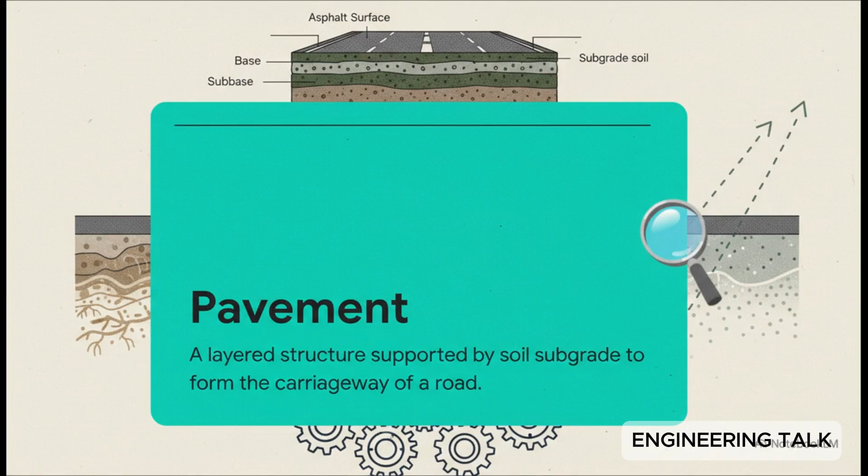Okay, so the official engineering term for this is pavement. But here's the most important part of that definition. It's a layered structure. This is so key. A road isn't just a big slab of stuff they pour on the ground. No way. It's actually a super complex system engineered from the soil all the way up.

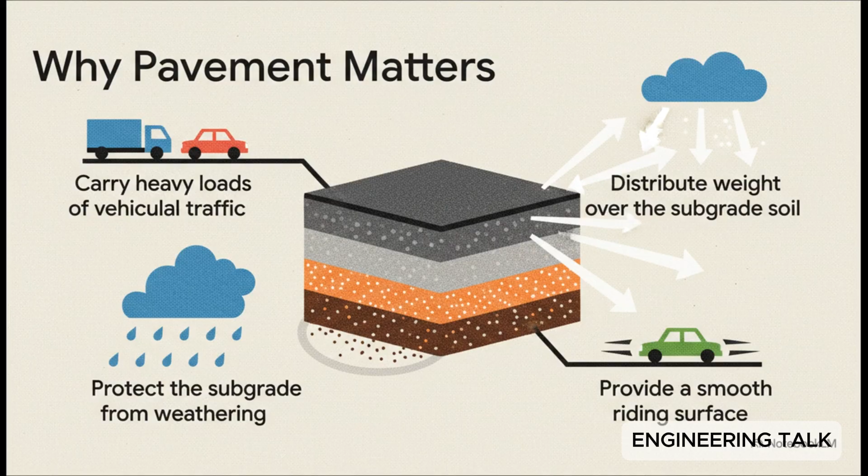And every single one of these pavements has some really critical jobs to do. First, it's got to be strong enough to handle all that traffic. We're talking cars, huge trucks, the whole shebang. It also has to spread out the weight of those vehicles so it doesn't wreck the soil underneath. And of course, it needs to give us a nice, smooth ride while protecting that soil from rain and snow. So how do engineers pull all that off? Well, this is where we meet our two contenders, the two main players in the world of road design.

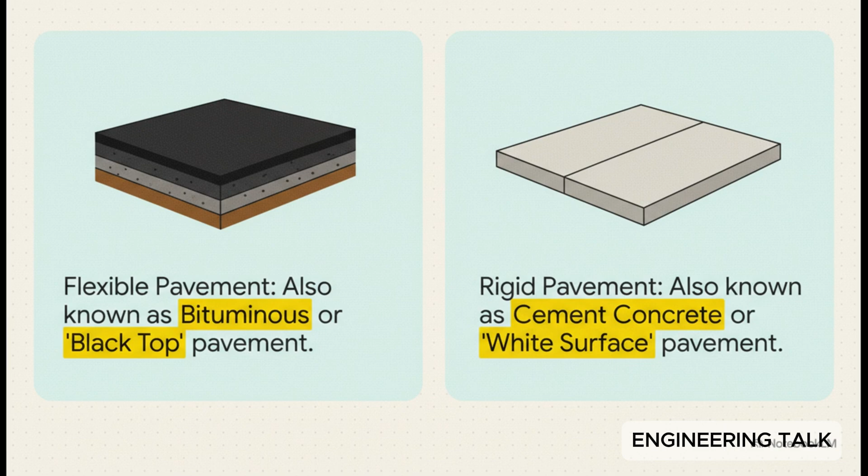All right, let's put some names to these faces. The black roads, that's what we call flexible pavement. You probably know it as asphalt or maybe blacktop. And the gray ones, those are rigid pavement, which is just good old cement concrete. But those names, flexible and rigid, they tell you everything you need to know. And I mean it, because the difference here is way more than just the color.

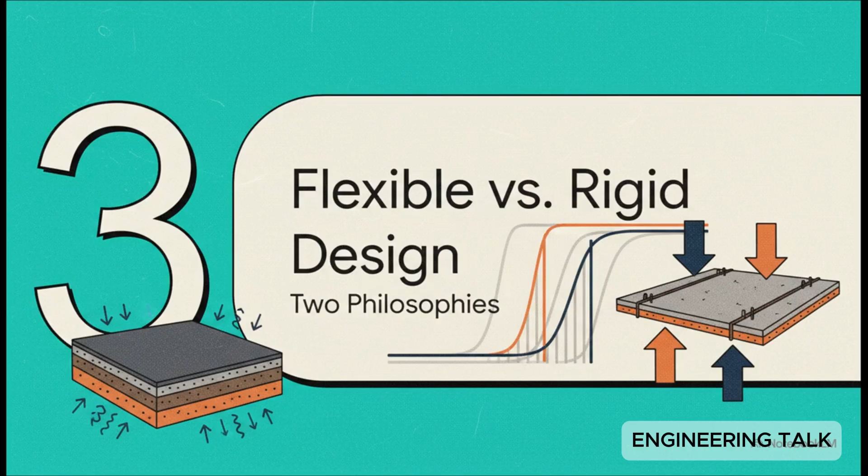We're talking about two completely different philosophies of how to build something strong. And for engineers, choosing between them is a huge decision. It's a big trade-off. They have to think about everything: the cost, the climate, the traffic, and just how long they need that road to last. So let's start with flexible pavement. The name really gives the game away, right? It's designed to bend or flex just a little bit when a car drives over it.

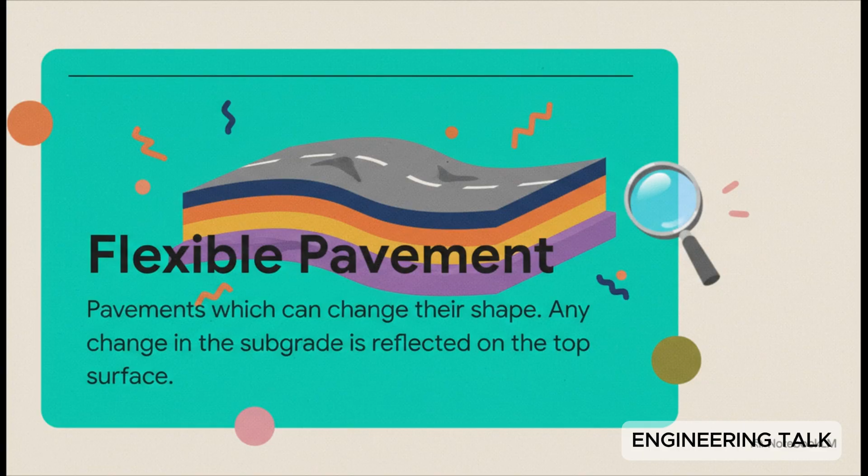Here's a great way to think about it. Imagine you put a big stack of magazines on a really soft bed. If there's a dip or a lump in the mattress, the magazines are going to bend and follow that shape. That's kind of how flexible pavement works.

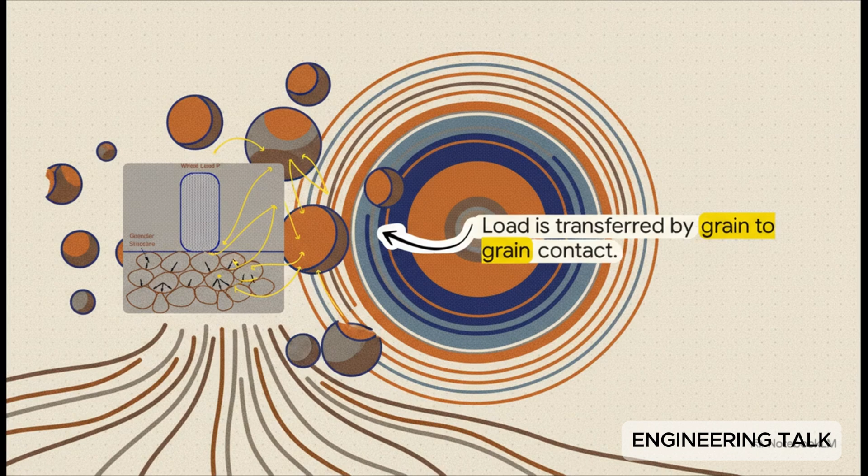And this is what that looks like on the inside. The weight from a tire doesn't just push straight down. Instead, it gets transferred from one tiny piece of rock to the next, spreading out in a cone shape as it goes deeper and deeper into the road's layers. It's all about that grain-to-grain transfer of pressure. Okay, now for the total opposite, rigid pavement. As you can probably guess, this stuff does not flex at all.

Let's go back to that mattress analogy. This time, instead of magazines, imagine laying a big, thick sheet of plywood on the bed. That board is so stiff it won't bend into the dips. It just bridges right over them, spreading your weight out across a much, much wider area.

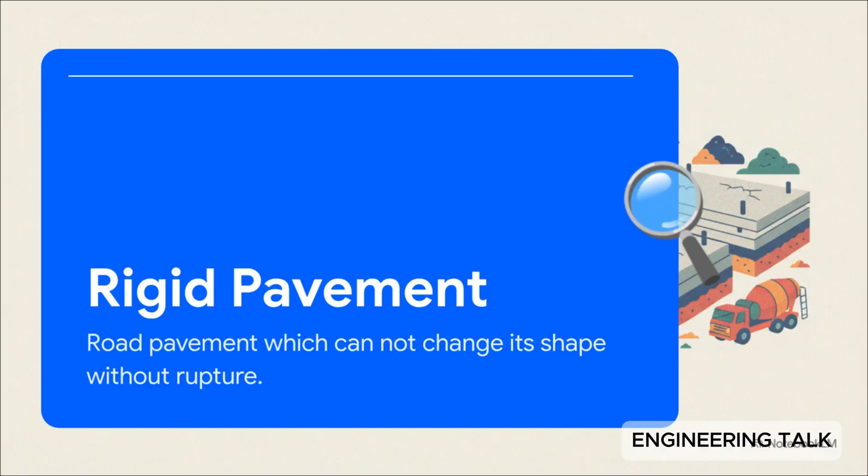And that's the whole philosophy right there, because it's so incredibly stiff, so rigid. Any little imperfections in the soil way down below don't really affect the surface you're driving on. All its strength comes from what engineers call slab action. The whole thing acts like one giant, super strong plate.

All right, so we've got the why. Now let's get into the how. How are these things actually built? Because the real secret, the magic behind both of these designs is hidden in their layers. Let's dig in and see what's going on underneath.

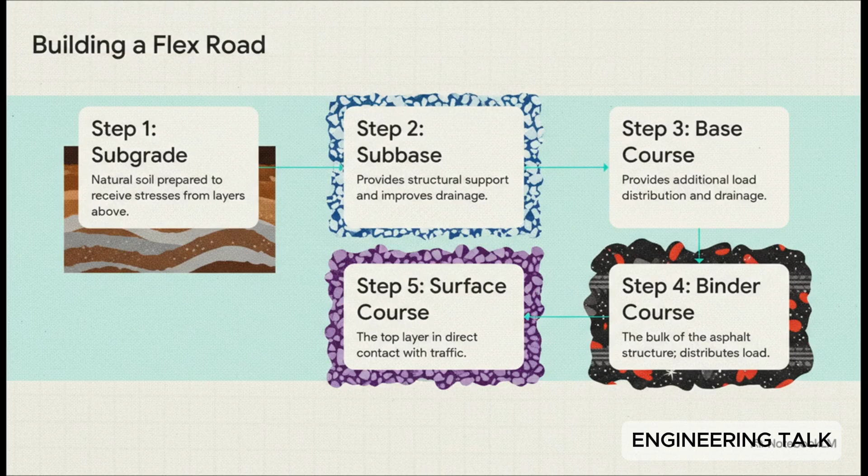So let's quickly build a flexible road from the ground up. First, you start with the soil itself. That's the subgrade. Then you put down a subbase, which helps with drainage and support. On top of that goes the base course, which is the main strength layer. Then you've got the binder course, which is the thickest asphalt layer. And finally, you have the surface course, the smooth part our tires actually roll on.

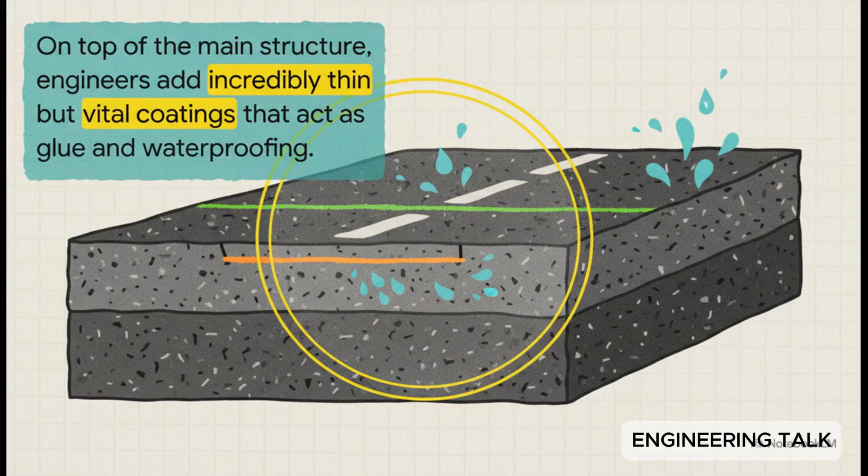But believe it or not, we're still not done. To make sure all those layers work together perfectly, engineers add a few more super thin but absolutely critical coatings. First up is something called a prime coat. This is a really thin liquid that soaks into that grainy base layer and basically plugs up all the little holes. Then they spray on a tack coat.

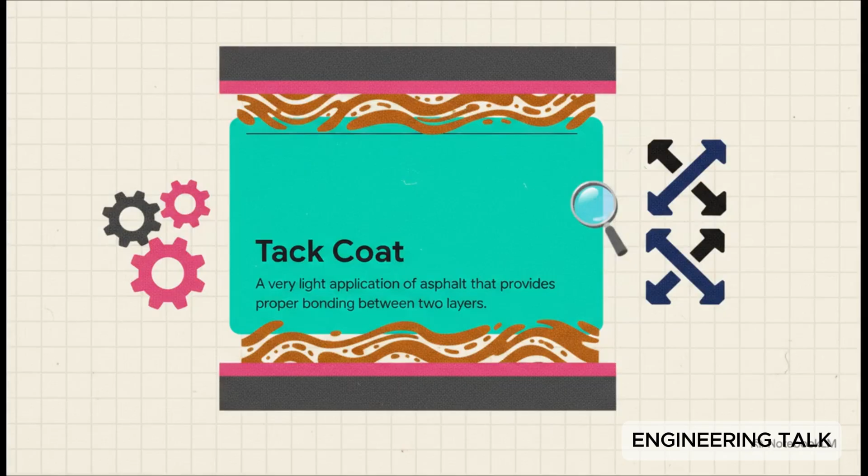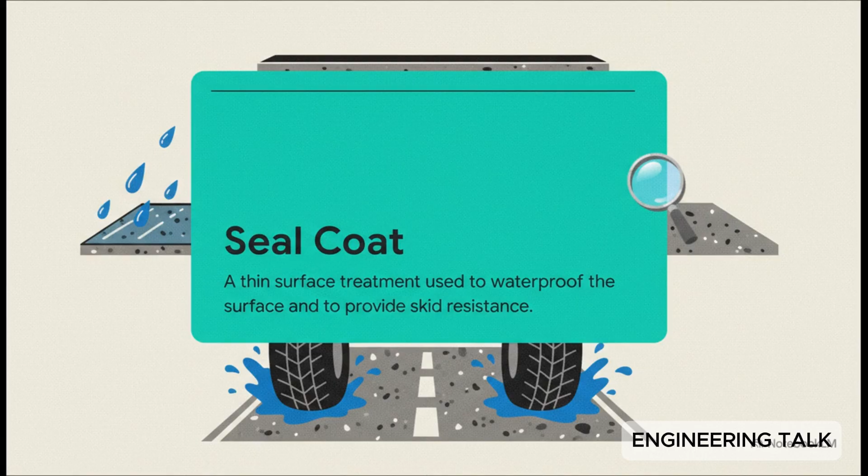This stuff is exactly what it sounds like. It's super sticky, almost like a glue, and its whole job is to make sure the different layers of asphalt bond together and don't slide around. And finally, you might get a seal coat. This is a thin layer on the very top that acts like a raincoat for the whole road, keeping water out, and it also gives your tires that extra bit of grip you need to stay safe.

Okay, so what does all this mean? What's the big takeaway from all this incredible hidden engineering that's happening right underneath us? So let's wrap this up. Here's what you've got to remember. Our roads are either flexible, that's the black asphalt, or rigid, the gray concrete. Flexible roads work by passing the load down through a bunch of layers.

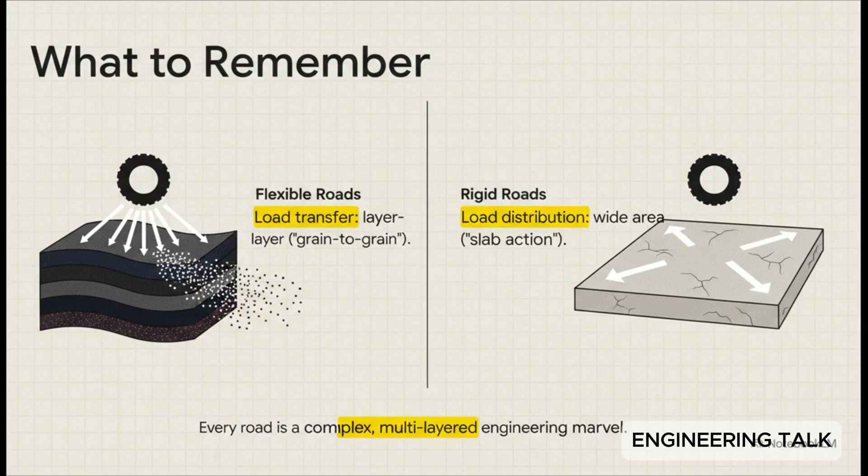That's the grain-to-grain transfer. Rigid roads, on the other hand, use the brute strength of one massive slab action to spread the load out. Both are just amazing feats of engineering, designed to handle an incredible amount of stress every single day. So next time you're out for a drive, you'll know the story of the road you're on. And really, it just makes you think, right? What other amazing pieces of everyday engineering are just hiding in plain sight all around us?